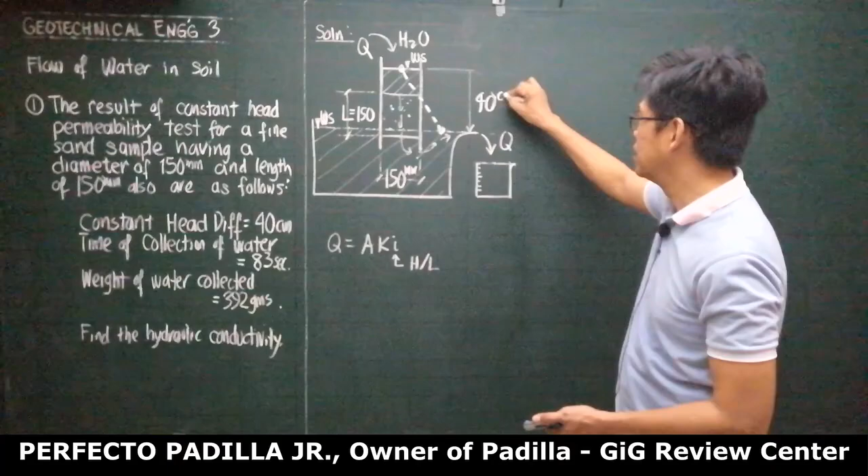The time of collection of water is 83 seconds and the weight of water collected is 392 grams. Remember that the density of water, gamma of water, is 1 gram per cc or cubic centimeter. Since this is 392 grams, at 1 gram per cc, this is also 392 cc.

What is being asked is the hydraulic conductivity, K. Let's solve for Q, the water gathered. Remember that Q is volume per unit time, and the volume is 392 cubic centimeters per 83 seconds. This is equal to the area times K times I.

The flow is here, and the area is pi over 4 times diameter squared. Let's convert to cm: 150 mm is 15 cm, so times 15 squared—this is the area—times K multiplied by I. I is H, 40, over L. The length of flow from entry to exit is 150 mm or 15 cm.

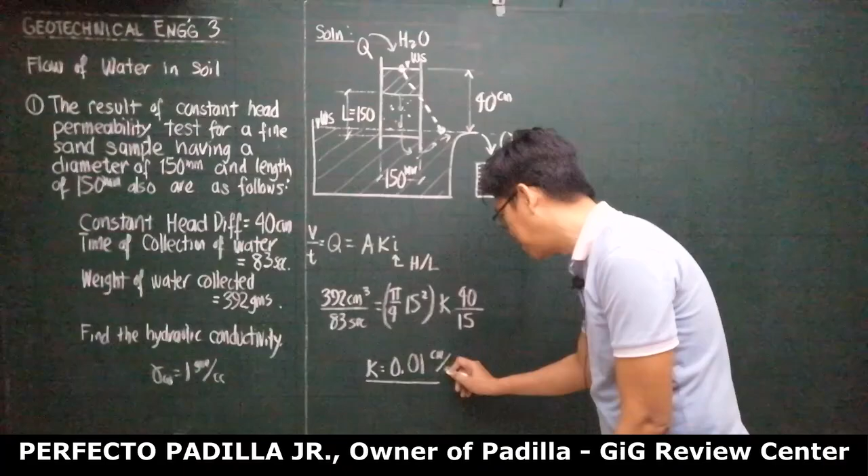So this is one equation in terms of K, and your K will be in centimeters per second because centimeters squared will cancel, leaving cm per second. Let me compute: this is 0.01 centimeter per second. You follow? Okay.

Hindi na ako mag-change ng unit or magko-convert. Anyway, parehas naman yung unit ng H, parehas yung unit ng K.

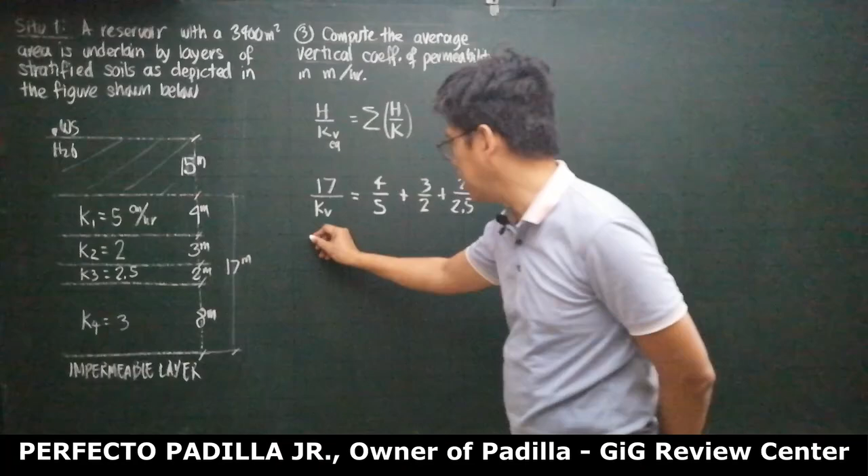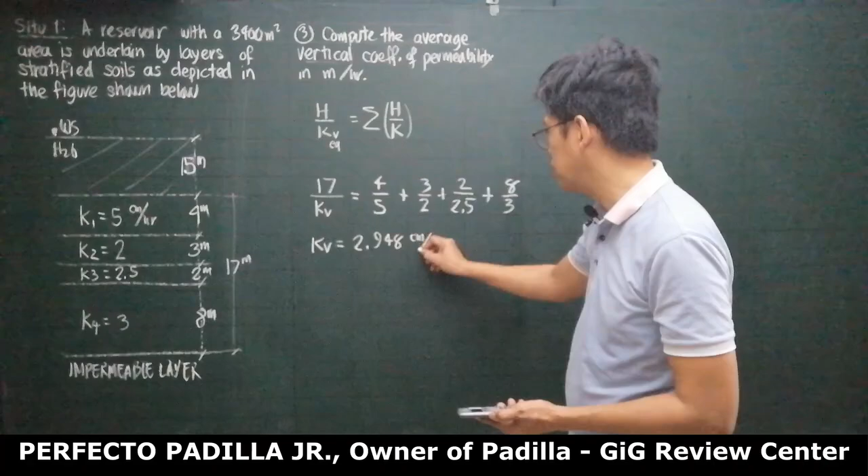So this would be 4 over 5, plus 3 over 2, plus 2 over 2.5, plus 8 over 3. One equation in terms of KV will be able to solve KV. And KV, if you compute it, it would be 2.948, and this would take the same unit as this, centimeters per hour. Okay? Sige, kopya.

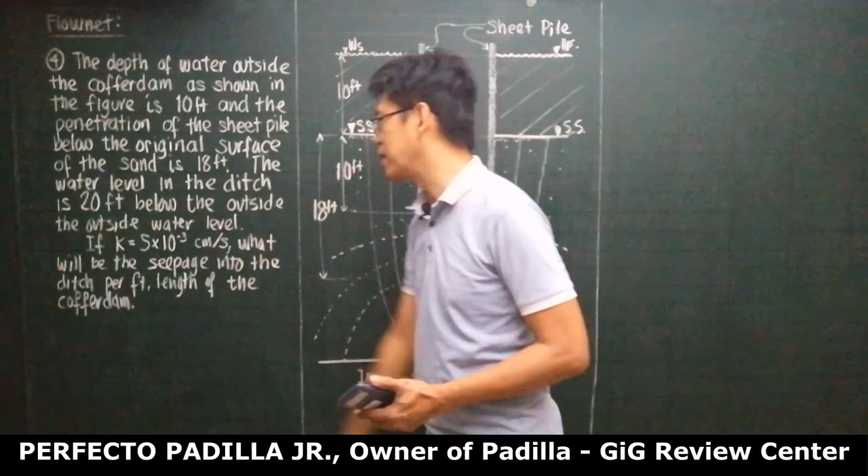What about this problem? According to this problem, the depth of water in this cofferdam outside is 10 feet. And the penetration of the sheet pile, this is the original sand layer. So the depth of penetration from here is 18 feet. From here to here is 18 feet. And the water level in the ditch is 20 feet below the outside water level, no? So this is the outside water level and this is the inside water level. This is the ditch, no? O yung daanan ng tubig sa, parang kanal ba, sa loob.

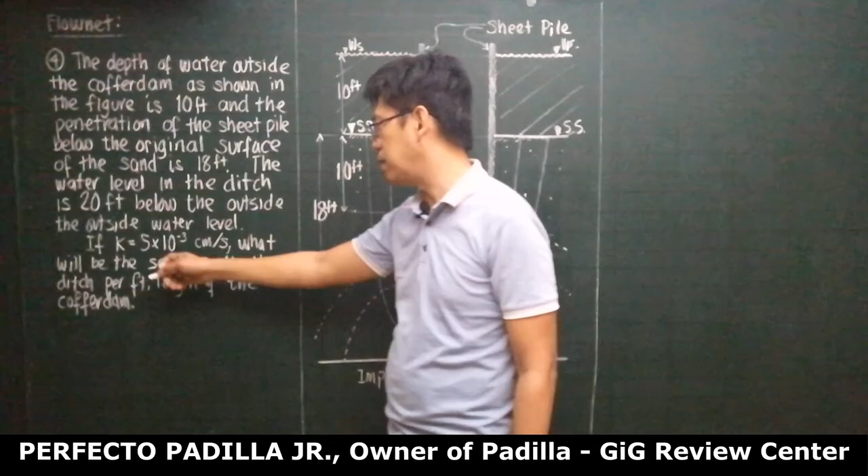So this is 20 feet below this, so 10 feet, 10 feet. According to this, K is 5 times 10 to the minus 3 centimeters per second. We are asked here, what will be the seepage into the ditch per foot length of the cofferdam?

Now, di ba sabi natin, ang formula natin para sa Q is equal to NF over ND times K times H. This is our formula. Okay? So this NF is the number of flow channel, ND is the number of drops or number of grids.

Ganito. Water will always flow through from higher elevation to a lower elevation. So alam natin ito yung entry point ng water. Dito papasok, dito lalabas. Correct? Ang energy level dito nasa surface. The energy level here sa exit point is nasa surface. From here to here, the head or the drop is 20 feet. So our H here is, this one is 20 feet. Yung K natin is 5 times 10 to the minus 3 centimeters per second. We will convert that into feet per second.

Na? Now, ano yung NF? Ano yung ND? Yung NF saka ND, number of flow channels, water will flow from here to here. And from here to here, dalawang side. Kung isang side lang ito, kaso dalawang side, so times 2 sides. Isa rito, isa rito. That is the total Q. Tama? Maliwanag? Okay. Now, yung number of flow channel per side, 1, 2, and 3. Yung parang lanes ba? Daanan ng tubig. Okay? So, you have here 3, di ba? So, ito is 3, this one.

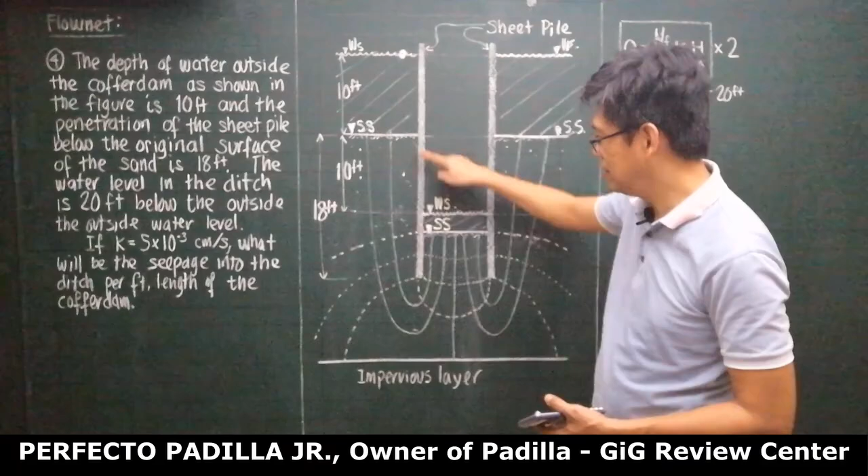What about ND? ND is the number of grids mula sa pasukan hanggang sa labasan, no? 1, 2, 3, 4, 5, 6, 7, 8. So there are 8, di ba? So 1, 2, 3, 4, 5, 6, and 7. This is not an equipotential line, no? This is 1, okay? 1, 2, 3, 4, 5, 6, and 7. Okay? So this is 7.

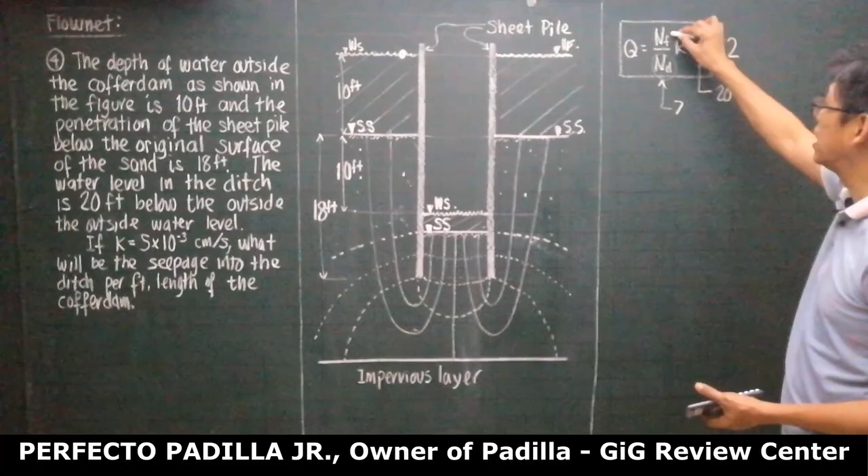And NF is 3. So we substitute our Q is 3 over ND, which is 7, times K. Our K is 5 times 10 to the minus 3 centimeters per second. So this is 0.005 centimeters per second. I-convert ko siya sa feet, ha?

So, this one: centimeters above, centimeters below, feet above. Kaya na ba natin? Okay, yung centimeters, gawin nating meter, ha? Centimeter is 0.01 meter, so this is meter. 1 meter is 3.28 feet, so this is already feet. So, meters and meters will cancel, so feet per second yan.

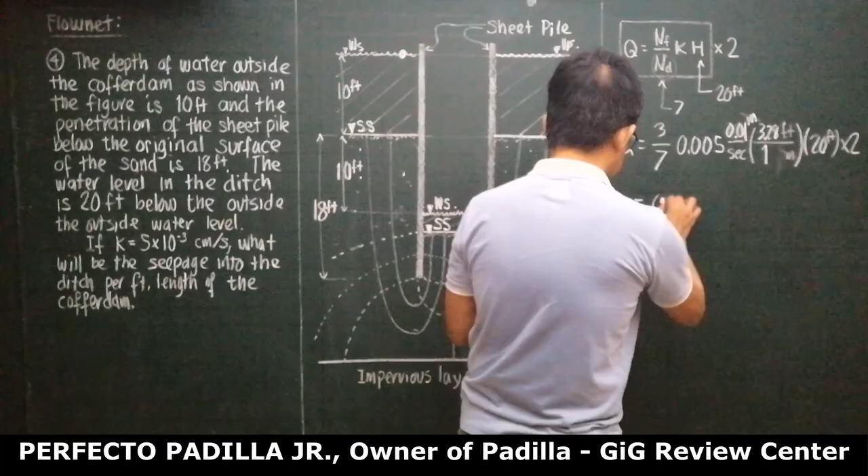Times H, our H is 20 feet, times 1 foot width, no? So, manglalabas feet, cubic foot, times 2. Okay, so computing that, we have 0.0028 cubic foot per second. You follow? Sige, paki-absorb.

Okay, let's move on to effective soil pressure. Soil pressure, vertical soil pressure is summation of gamma H, and parehas din yan sa soil. Basta vertical, kasi vertical yung gamma H is brought by gravity. Kaya yung gamma H na formula, kahit anong substance, solid, liquid, gas, applicable yan. Okay. However, pagdating sa soil, dahil meron niyang soil and merong water component, in the computation of shear strength, which we shall discuss later, kailangan natin ng effective soil pressure pati dun sa soil settlement.

Okay, so dito, yung tinatawag na gamma effective is simply gamma dry minus the unit weight corresponding to water only with the equal volume of the gamma dry.

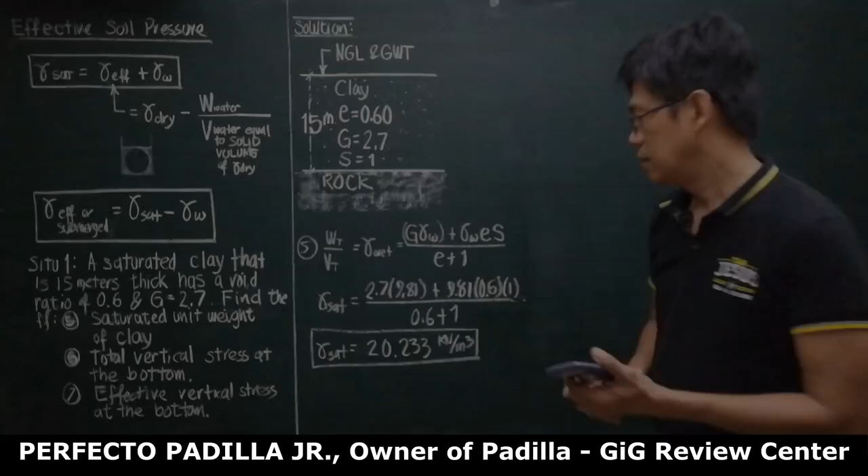Okay. Yung susunod na tinatanong, number 6, we're asked to find the total vertical stress at the bottom dito. So, this is going to be total pressure, P total, is the total unit weight, gamma sat. The total unit weight is gamma sat, right? So, gamma sat multiplied by H, which is 15. So, this is

20.233 times 15. So, you calculate this. This is going to be 303.5 kilopascal.

Now, in number 7, we're asked to find the effective vertical stress at the bottom. One way to solve that, the P effective at the bottom is gamma effective times H.

Gamma effective is gamma sat minus gamma water, times H which is 15. Our gamma sat is 20.233 minus gamma water 9.81, times 15. And this would be 156.345 kilopascal.

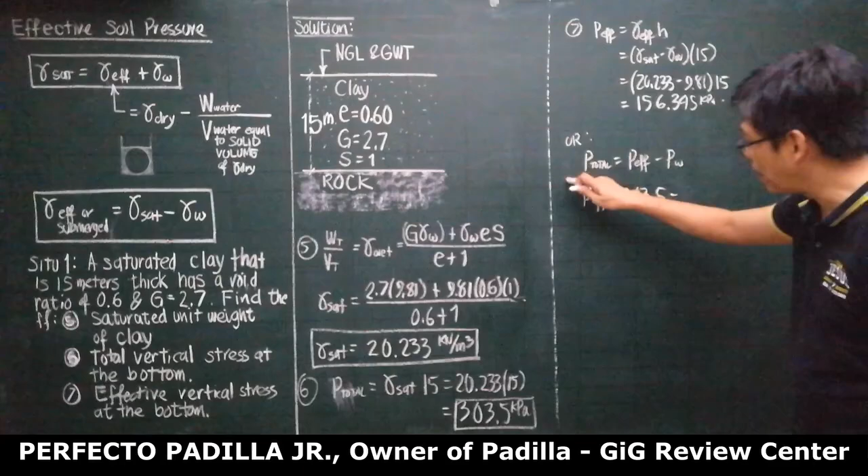Got it? Or another way to solve that: P total is simply P effective plus pressure due to water. So our P effective must be equal to P total, that is 303.5, minus... this is plus, no? P total is P effective plus water. So therefore this is plus pressure of water, gamma water 9.81 times 15.

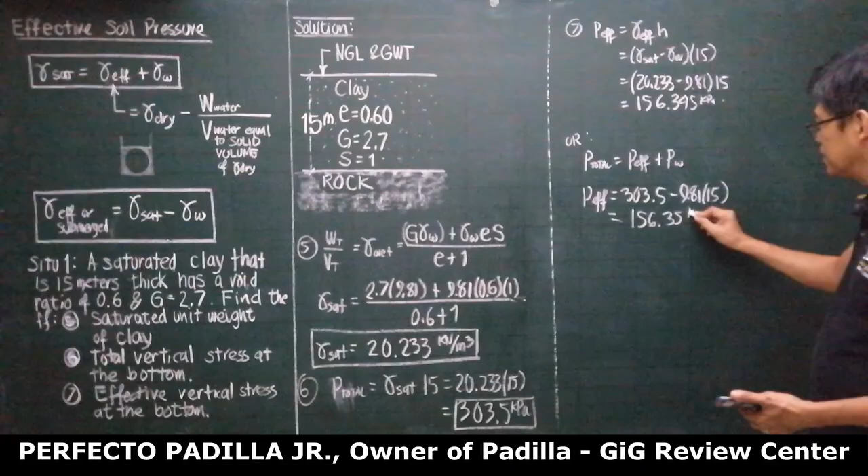So therefore this must be exactly the same as this, 156.35 kilopascal. Got it? Clear? Okay, go ahead and absorb that.

Let us have this problem. When we say lateral, it means horizontal. Now, in liquid or water, the vertical pressure is gamma H. The horizontal pressure at that depth is also gamma H. That's what Pascal said, that in an ideal fluid or incompressible fluid or liquid, pressure is transmitted or radiated in all directions unreduced.

But when it comes to soil, it's not unreduced, it is reduced. So if gamma H is the vertical pressure going down, the horizontal is gamma H times a certain number, called the coefficient of lateral pressure. If it's a reaction, then that would be passive pressure.

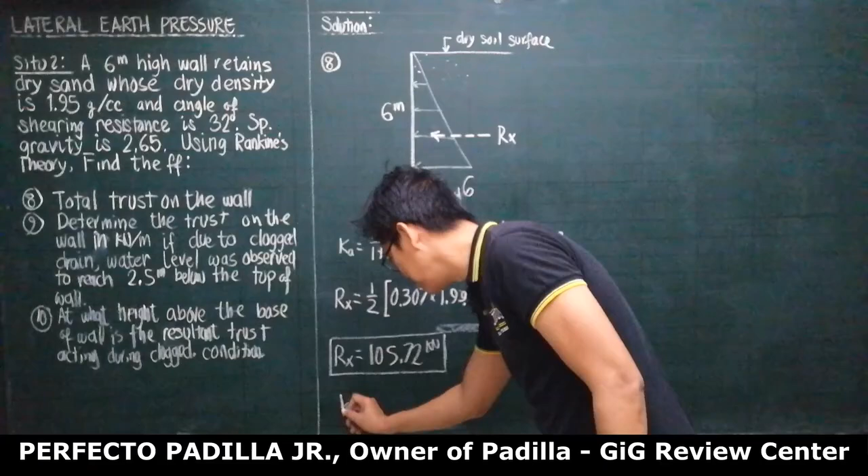Got it? So when it's active pressure, the gamma H is simply multiplied by Ka. Our Ka is 1 minus sine phi over 1 plus sine phi. But when it's called passive, K passive is equal to 1 over Ka. Because Ka is less than 1, Kp is more than 1.

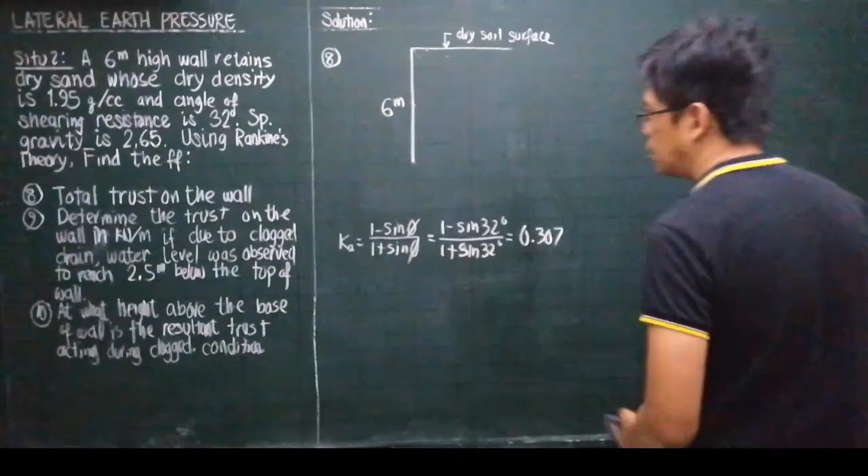Okay, what about item number 9? We are to determine the thrust on this wall due to clogged drain. So we have a drain, but it clogged. But maybe not all of it, right? Because if all of it clogged, the water would reach up to here.

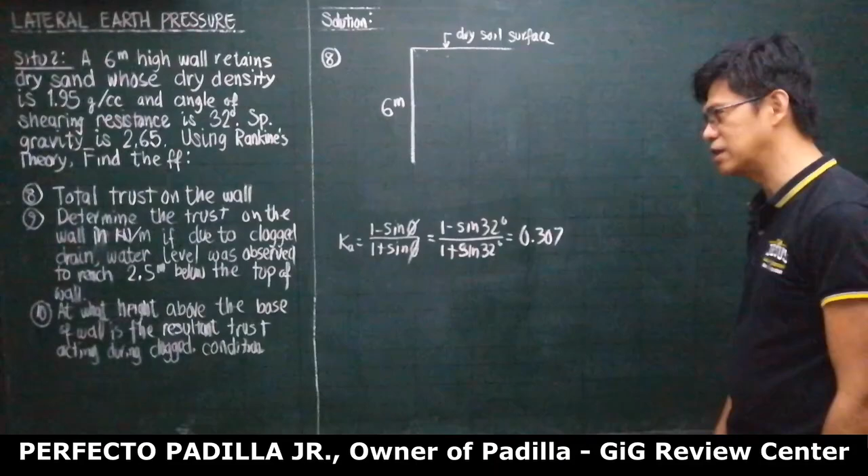So due to clogged drain, meaning during heavy rainfall, the water here doesn't go down. Instead, the water table rose to 2.5 meters below the top of the wall. So if this is the top of the wall, it reached 2.5 below. Here is the water table. I would presume, since no saturation above the water table was given, I will still presume that this is dry.

So this is our water table, meaning this is saturated. Okay? Actually, it's not really possible to have dry then suddenly saturated. There's an in-between within the capillary region. Anyway, just for the sake of the problem, we presume that this is dry and this is saturated.

Let me label this here. This is dry soil, this is saturated. Now remember our K for soil is 0.307. But what is the K of water? It's 1, right? If it's gamma H for water, horizontally it's still gamma H for water. That's why effective soil pressure is important.

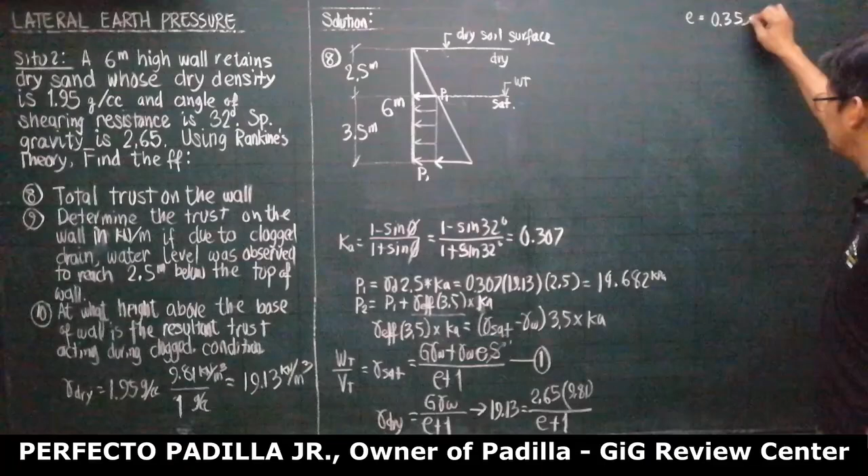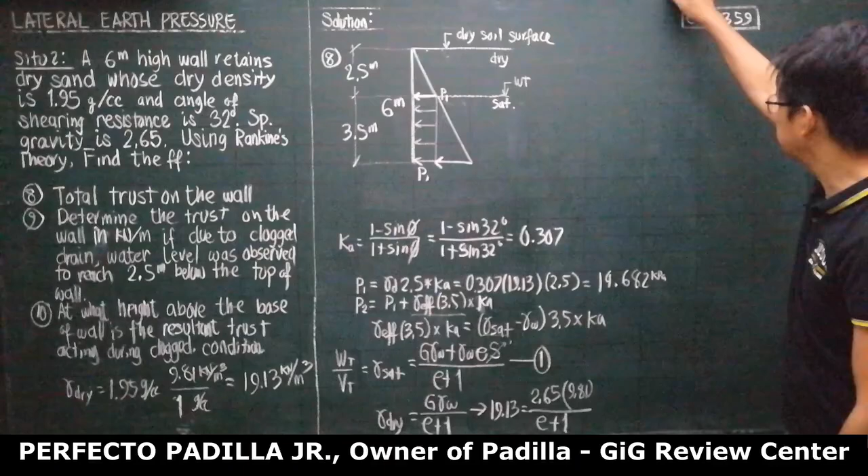Meron na tayong E. We are ready to solve our gamma sat. Yung gamma sat natin, our gamma sat in equation 1, is going to be equal to G, that is 2.65, multiplied by gamma of water, 9.81, plus gamma water, 9.81, multiplied by E times S, which is 1. Our E is 0.359. S is 1 over E plus 1, 0.359 plus 1. So you solve this one, we'll be able to get gamma sat is going to be equal to, pag sinolve mo to, you'll get 21.721.

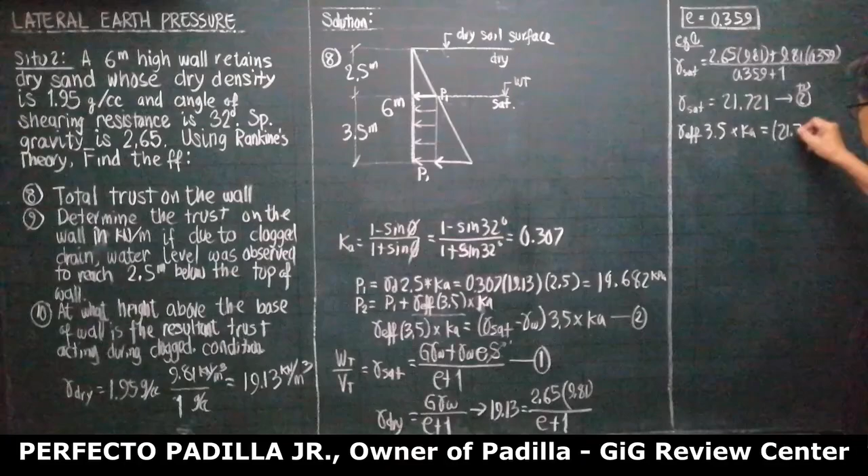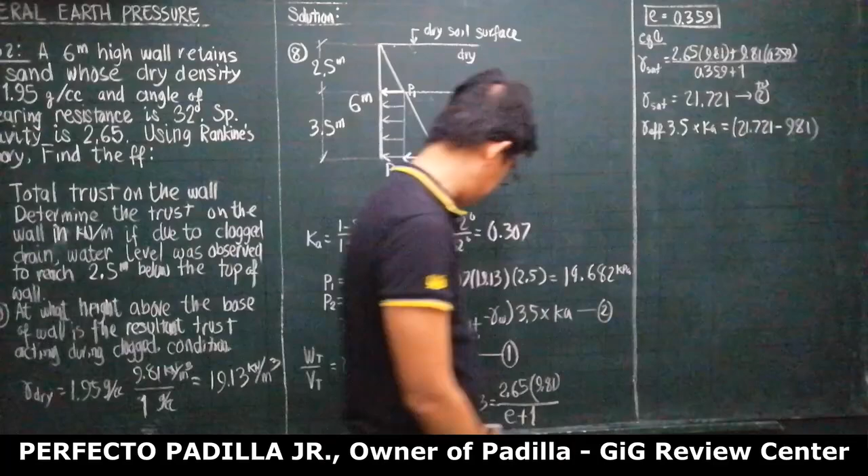So we are ready for this one. Therefore, tawagin natin itong equation 2 na lang, patras. Okay? Our equation 2, so substitute this to equation 2, you'll have here yung ating gamma effective times 3.5 times Ka is going to be equal to this, 21.721 minus gamma of water 9.81, correct? So minus 9.81 times 3.5 times Ka, which is 0.307.

So if we're going to compute this, this will be 12.8 kilopascal. So let me reflect that in the drawing, the value, this is 12.8. Your P1 is 14.682. Ito is pressure due to effective soil. Pero may tubig yan eh, pero ang tubig hindi mula dito. So yung pressure due to water, ito. This is going to be gamma water times height. The height of water is 3.5. So gamma water times height of water, 3.5. So this is 9.81 multiplied by 3.5. Ano ang multiplier na K? 1, kasi tubig to.

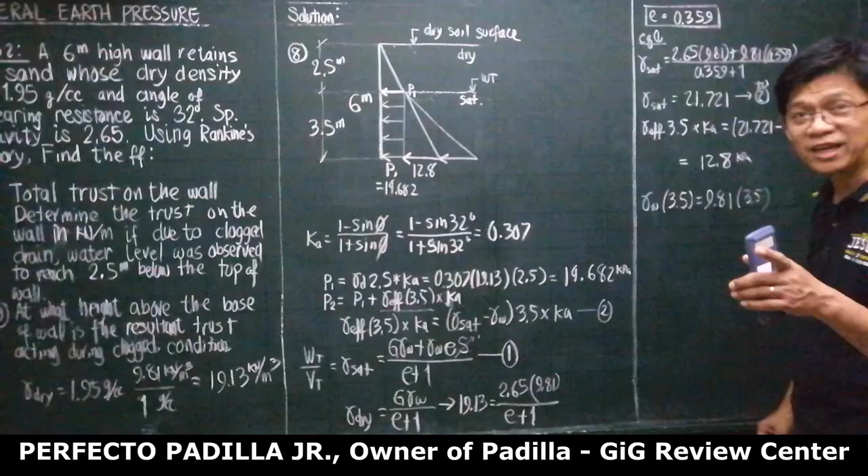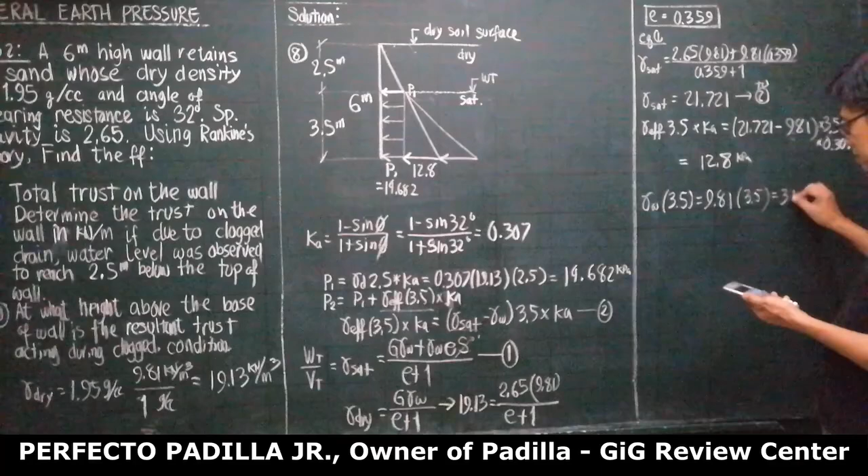This is pressure due to water. So, therefore, this is going to be equal to 34.335 kilopascal. Naintindihan? So kung kukumputin natin yung mga resultant, tawagin natin tong F1. For the rectangle, tawagin natin tong F2. For this triangle, tawagin natin tong F3. While for this triangle, let me call this F4. Computing all those forces, our F1 is going to be the volume of that pressure prism, area ng triangle, 1/2 the base.

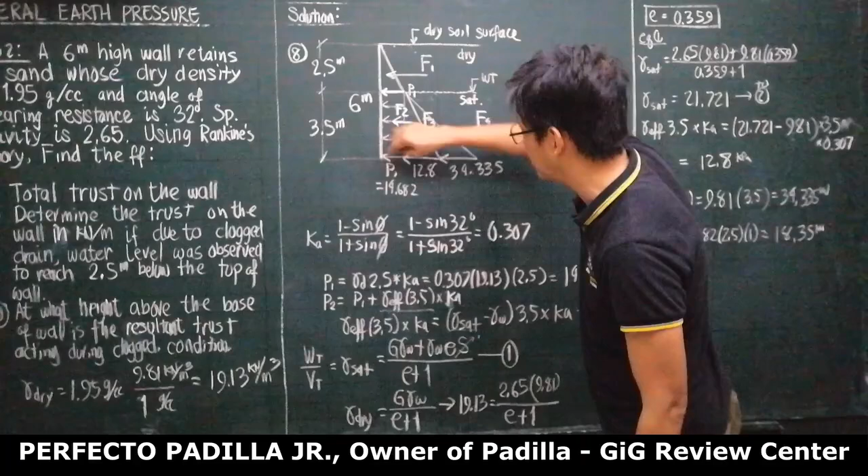The base is P1, which is 14.682, times the height, 2.5, times 1 meter strip. You compute this in your calculator, what you will have will be 18.35 kilonewtons. So computing yung F2, our F2, this one, is the volume of this rectangular pressure prism. So that is simply area of rectangle, P1 times height. So it would be 14.682 times the height, which is 3.5, multiplied by 1 meter strip. So you compute this and you will get here 51.38 kilonewtons.

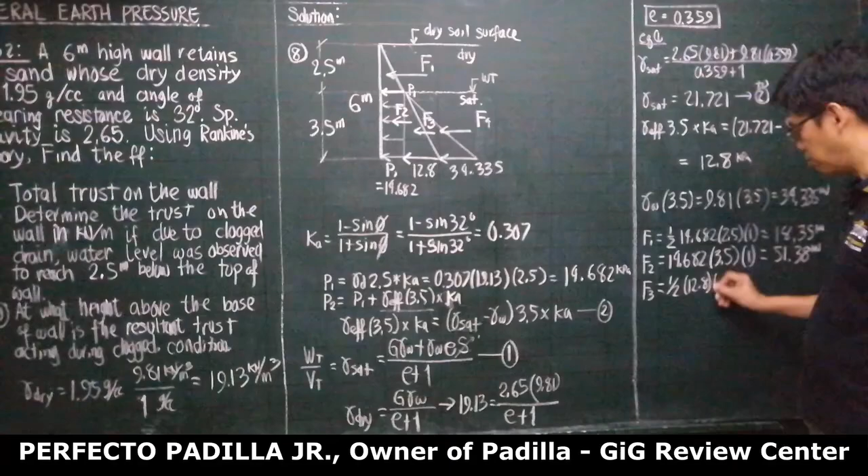Now, yung F3 naman is going to be the volume of this triangular pressure prism. It's the area of the triangle, 1/2 of base, which is 12.8, multiplied by the height, 3.5. I'm referring to this triangle. The volume of that triangle is F3. So, times 3.5 multiplied by 1 meter strip. So you calculate this one and you compute, you'll get 22.4 kilonewtons.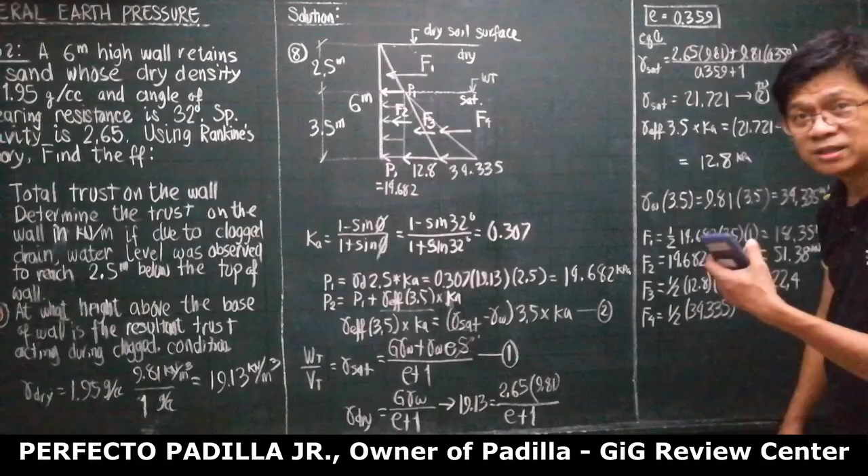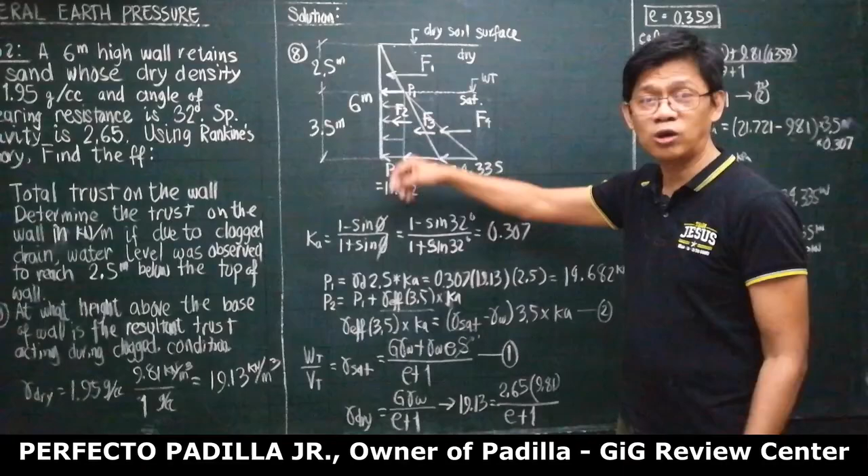Lastly, for this water pressure, our F4 is going to be equal to 1/2 of the base, 34.335. As you can see, the pressure of water is not negligible - this is actually even more than the pressure exerted by the soil itself. So, 34.335 multiplied by the height, this is 3.5. 1/2 of this times the height, 3.5. The height is not this one, this is slant height. By rule of perpendiculars, the area of a triangle is 1/2 base times height. Base is horizontal, height is vertical. Times 1 meter strip. So you calculate this and this is going to be equal to...

60.09. If you total this now, this is the resultant force. The resultant force is simply the summation of horizontal forces. And this is 18.35 plus 51.38 plus 22.4 plus 60.09. You add this and you'll get 152.22 kilonewtons. Understood? Okay, please absorb this first.

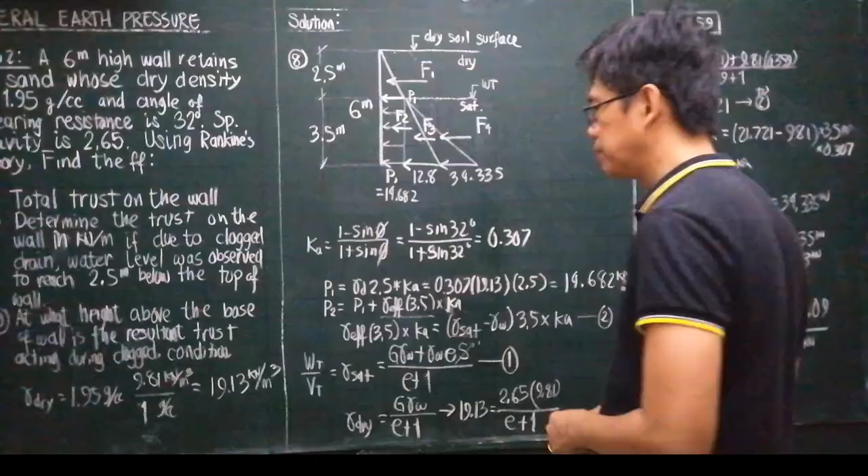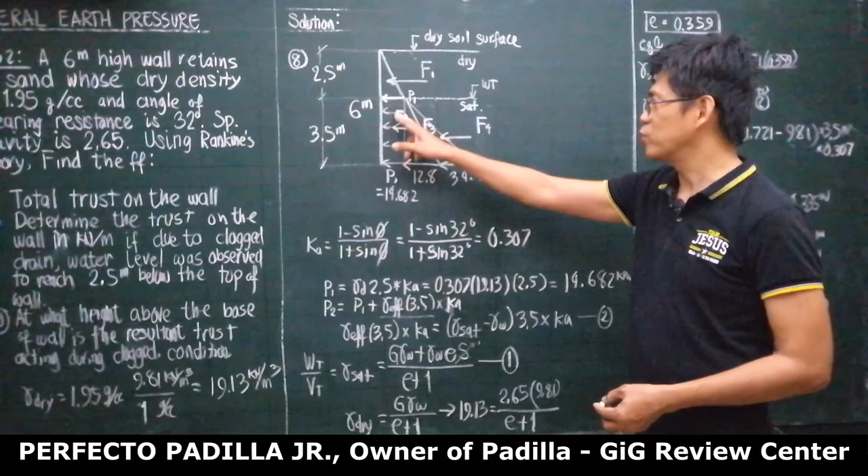So what about this number 10? At what height above the base of wall is the resultant thrust acting during the clog condition? So if these are the forces F1, F2, F3, F4, the resultant of these, this is 152.22 - where is it? Let's say the resultant is here.

Let us call this Rx, and the vertical height from the base is y bar. Now, Rx is the resultant of F1 to F4, right? So we say by Varignon's theorem, the moment of the whole equals sum of the moments of the parts.

So let us apply Varignon's theorem to solve y bar. The moment of Rx about the base equals sum of moments of all other forces composing Rx, about the base. So our Rx, we found this to be 152.22 kilonewtons, and the moment arm about the bottom is y bar. So Rx multiplied by y bar equals F1 times its moment arm. The moment arm of F1 from the base, since this is a triangle, is 1/3 of 2.5, about the base, plus 3.5. So it would be F1, our F1 is 18.35, multiplied by 1/3 of 2.5 - that is the position of the centroid of the triangle - plus 3.5.

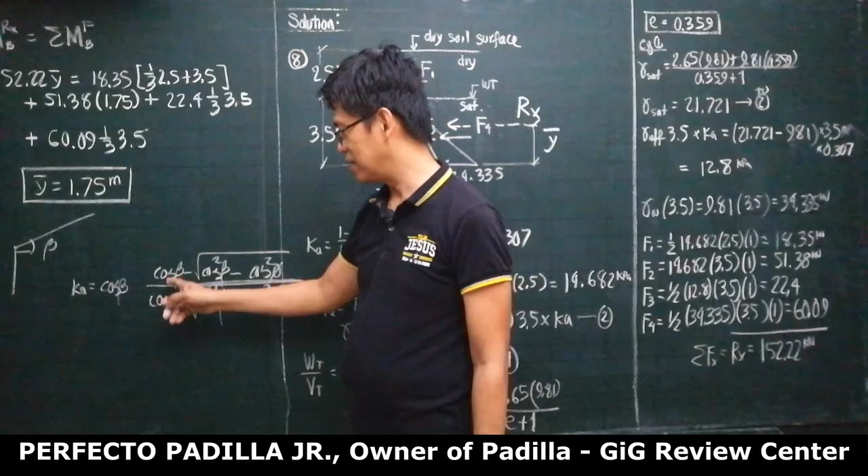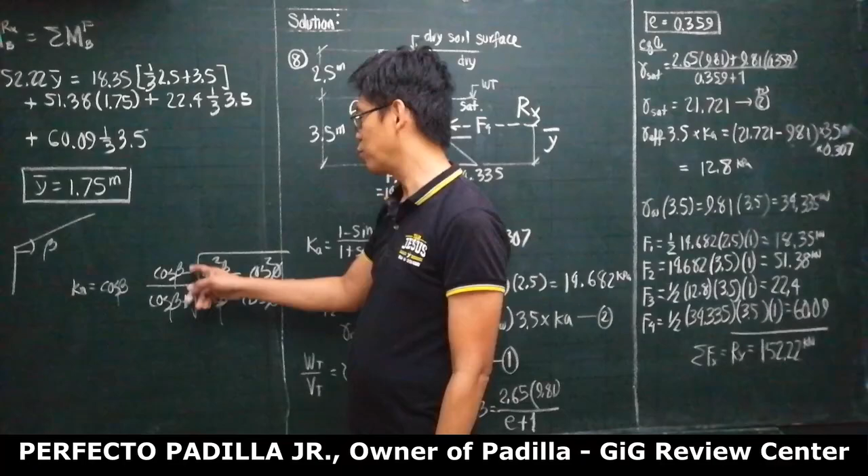For K passive, it's 1 over Ka. So Ka is less than 1, Kp passive is more than 1. Clear? Understood? When beta is 0, meaning flat like this, so beta is 0. When beta is 0, this becomes 1, 1, 1. So if this is 1 minus cosine squared phi, 1 minus cosine squared is sine squared. So square root of sine squared phi, that is sine phi. So it becomes 1 minus sine phi over 1 plus sine phi - this formula. Understood? Okay, please absorb this.

When it comes to settlement, the principle is this - I already discussed this under soil compaction. The analogy is a foam sofa or foam bed. This is the wood base, this is the foam. When you lie down or sit on it, the element that gets compressed or settles is not the wood part. The wood part relatively has no compaction. What gets compacted is only the foam, right? The foam gets pressed. Understand?

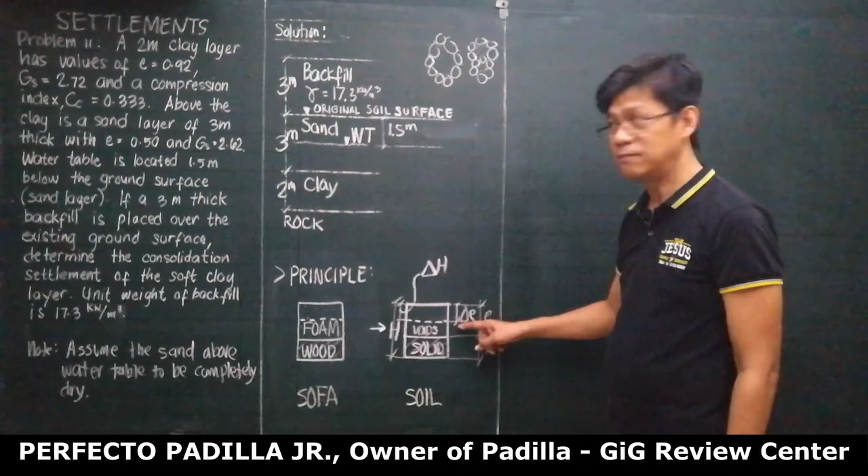So we'll use this analogy so we don't have to memorize a complicated formula. We have: delta H is to delta e, as H is to e plus 1.

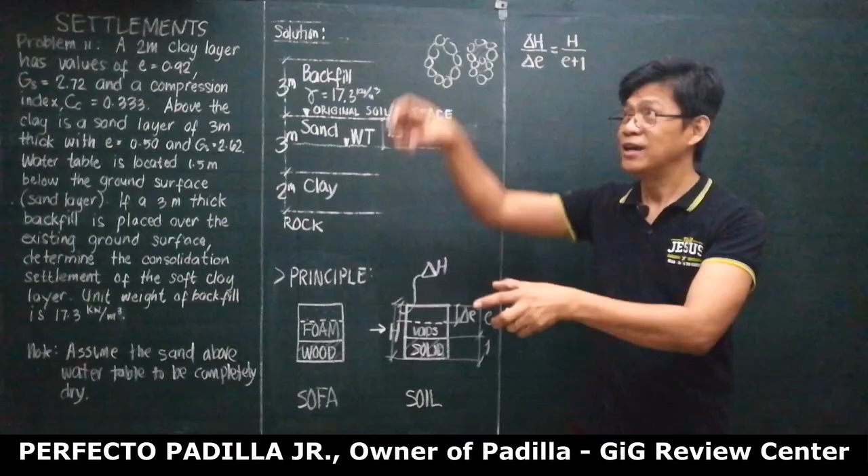Okay? Hindi basta-basta, hindi yun analogy lang. Pagmasdan yung sabi ha. Pag tinuloy mo yung sinabi ni Lord, ang sabi niya is, foolish is a man who builds his house on sand. The rain pours, the wind blows, representing shaking. The rain pours, representing water. Anong mangyayari kapag ang sand na-saturate?

Ang sand kasi, umaasa lang yan sa friction between particles to hold this together. Imagine, ito yung load. Kung ito yung load, umaasa yan sa shear strength. Yan yung topic natin after this. So kapag nasira yung support nito, mag-collapse yan. Tama? Mawawala ng support yung building.

Correct? So, umaasa ka sa friction. Pag linubog mo yan sa tubig, ang tubig will serve as lubricant. Mababawasan ang friction. So, pag nabawasan ng friction, lalo nang posibleng mag-fail yan. Right? Naintindihan? Lalo na kung nakalubog, yung friction will be negligible. Lalo na kung kinalog mo, pag kinalog mo yan, lulutang yan. Yun yung tinatawag sa geotechnical engineering na liquefaction.

Okay? The loss of strength due to loss of contact. Kasi friction lang inaasahan mo eh. Yun yung beauty ng clay. Kasi ang clay, kung pure clay, wala man siyang friction, pero meron siyang cohesion. Dahil malagkit yan, magkadikit talaga. Tama? May cohesion eh.

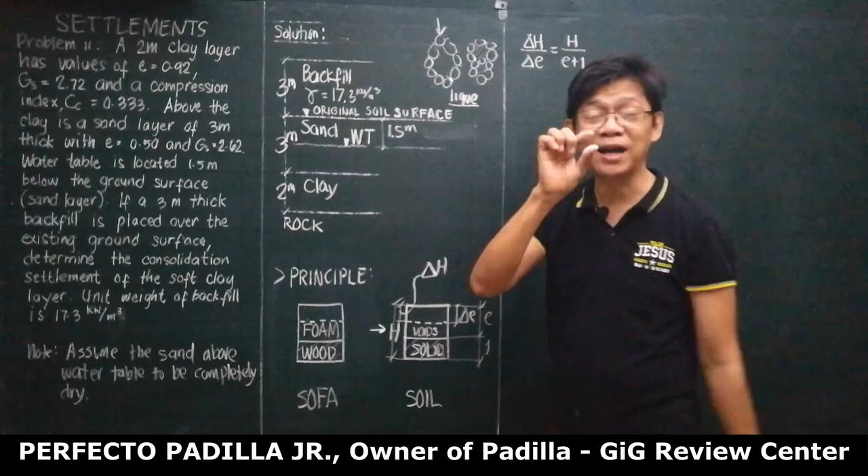Okay. Now, kapag kinalog mo yan, kahit kalugin mo yan, magkadikit pa rin yan. Pwedeng ma-deform ng konti or malaki, depende sa condition ng clay mo, pero still, hindi siya mawawala ng totally ng strength. Naintindihan nyo? Yun yung concept.

Kaya, after that, actually may kakilala akong structural engineer noon, a lot more senior than me, na yumaman dahil sa lindol na yun, no? Kasi, yung isang building, if I'm not mistaken, kaisa-isang building sa buong Dagupan, it's a 6-story building na siya yung structural engineer. Kahit hindi pa siya masyadong senior, nasa 27 siya noong time na yon.

Yun yung kaisa-isang building na pa-after ng lindol, 6 stories, hindi nagiba sa Dagupan. Bagong building. So, nakilala yung pangalan niya doon. After that, ang dami niyang naging project. Hindi ko na sabihin pangalan niya, ha?

Nung una, pinagtatawanan siya dahil OA daw yung pagkakakonstruct niya. Kasi 6-story lang naman. Tapos, hindi pa masyadong popular nun yung ginagawa na sa time namin yung pile foundation. Kasi yan yung thesis niya nung nag-aral siya. So, maraming nagtatawa sa kanya dahil 6-story lang yung building niya. Hindi, 4-story building, no? Tapos ipinail, ginamitan ng pile. Nakakatawa nung time namin, 4-story tapos ginamitan mo ng pile. Wala ngang elevator.

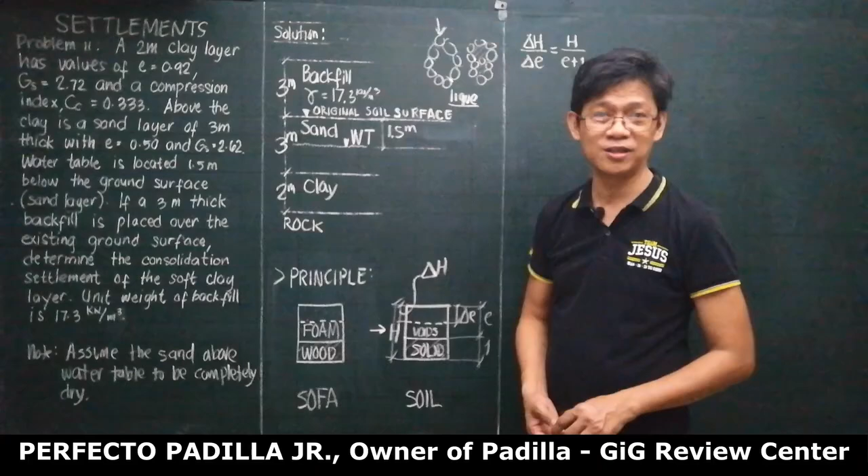Naintindihan niyo? Nakuha niyo yung concept nito? Maliwanag. So, foolish is a man who builds his house on sand, lalo na kung saturated. Pero hindi sinabi ni Lord na foolish is a man who builds his house on clay. Pero hindi niya rin sinabing wise. Pero dito sa Pilipinas, most of our soils are clayey. Meron talagang clay.

Kaya nga, itong halos buong Asia, kaya nga tayo ay rice eater. Hindi nyo ba napansin bakit tayo rice samantalang pwede naman talagang ang kainin natin potato? Bakit tayo rice eater? Although nag-grow tayo ng potato, it is simply because it is dictated by our soil. Kasi mayaman tayo sa clay soil. Alam naman natin ang gustong lupa ng palay, di ba? Clay. Naintindihan nyo ko? So, anyway, tuloy natin.

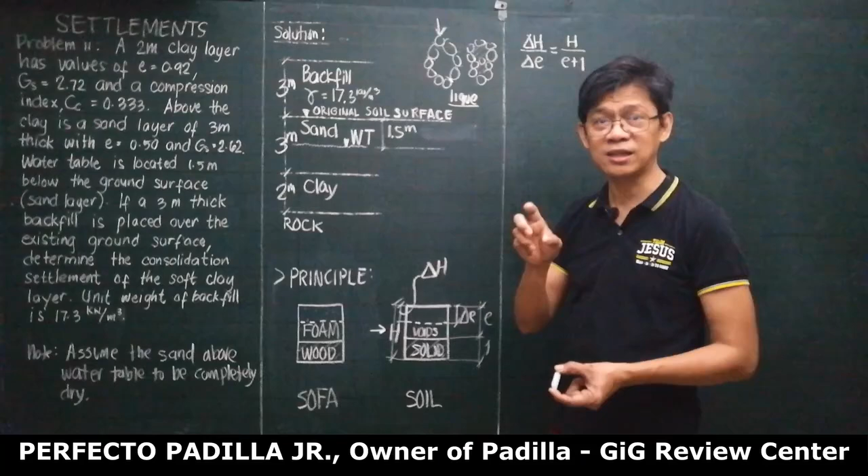So, hindi sinabi ni Lord na clay is a bad foundation. It is the in-between. Pero not close to being as bad as sand. Isa lang ang problema ng clay. That is the settlement.

It's not that it will not settle or it will settle very bad. Ang problema sa settlement ng clay is because the granules are very fine, yung moisture or yung water will take time para ma-discharge or ma-displace. So ang ibig sabihin, ang settlement niya will happen very or extremely gradual. Minsan, it will take years to realize yung full settlement ng clay. Kung magtatayo ka ng building nasa clay, maghihintay ka ng years bago mo ma-realize yung full settlement, baka hindi mo matapos yung building. So the challenge is to be able to predict accurately yung magiging settlement.

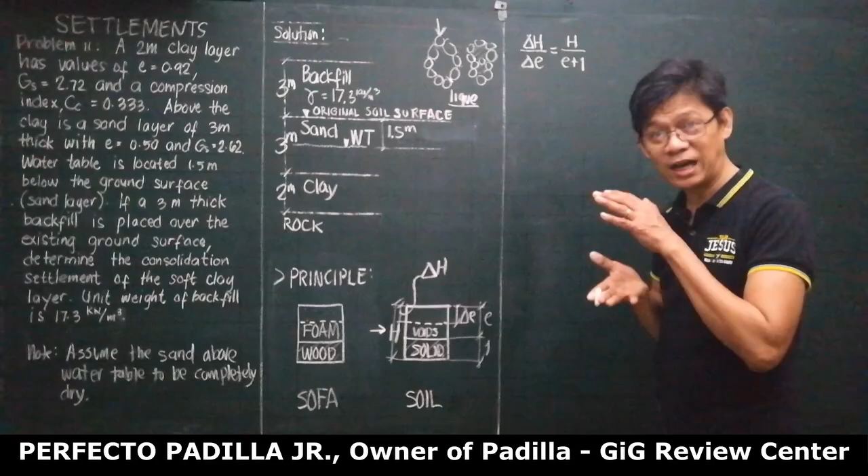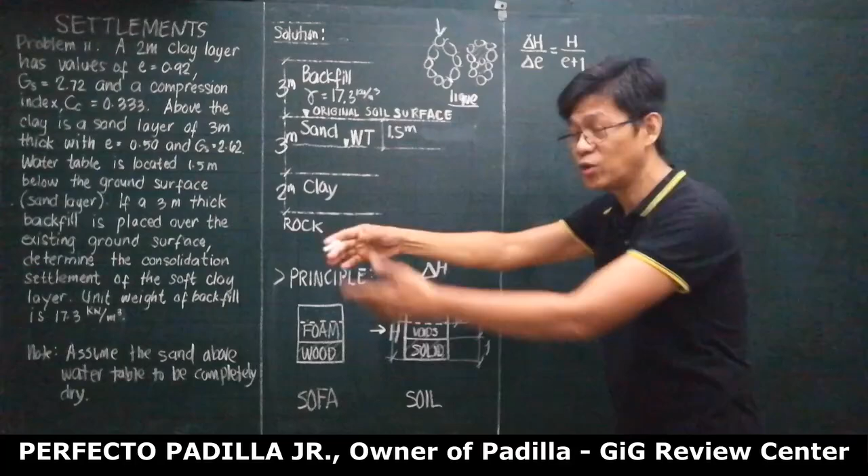Naintindihan? Okay, let's do it. So dito, etong delta H na binabanggit natin dito, automatically, ang pinag-uusapan natin, clay. So ito ay delta H in the H of clay, delta E in the E of clay, ito is E of clay at present. Itong dalawang to, present to. Ngayon yan. Etong delta E na to, saka tong delta H na to, future to. So ito yung predict natin. To be able to predict delta H, you will be able to predict or calculate accurately yung magiging change in E.

Naintindihan? Yung change in E, kinukompute natin yan using the E log P diagram. Mas magandang maintindihan nyo lang to kesa i-memorize lang natin basta yung formula. This is the E, this is the log of P. Our time allotted will not be sufficient to discuss all cases. So I will just discuss etong basic case, yung normally consolidated clay. Itong bend point na to, ito yung pre-consolidation pressure, PC, or yan yung pressure, PO, in case of a normally consolidated clay.

So equal to PO for normally consolidated clay. Naintindihan? Okay. Now, ito, the slope of this is the consolidation coefficient. So or compression coefficient. Some call it that way. So this is 0.009 LL minus 10. LL is the liquid limit in percent.

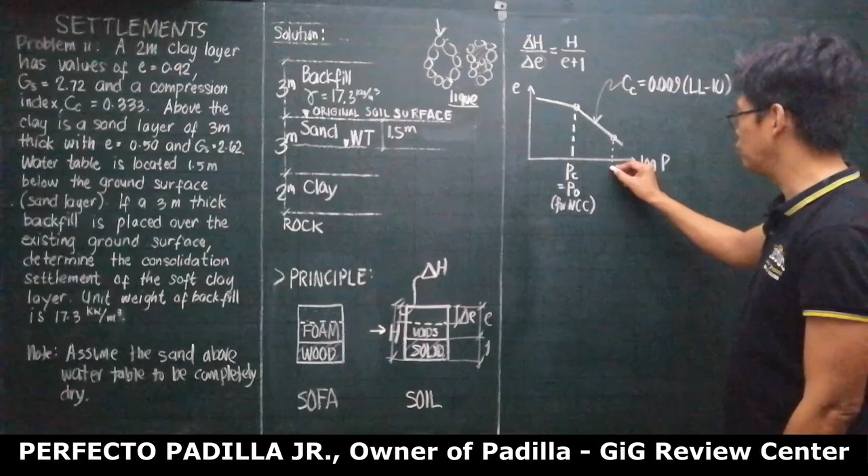Okay? Now, etong horizontal naka-log. So etong point na to is representing the pressure at mid-clay layer plus the pressure added by the structure or by the additional load. So ito will be PO plus delta P. So, di ba, yung change in X is X right minus X left. Kung yan ay P or X lang. Pero ito log X or log P. Ang ibig sabihin kung ito PO, mula dito hanggang dito, dito ko lang sulat ha, this must be log of PO. Kung ito PO plus delta P, yung distance nitong point na to from this vertical axis is log of PO plus delta P.

Kaya itong horizontal na to, taking it from this triangle, ito, this horizontal is going to be log PO plus delta P minus log PO.

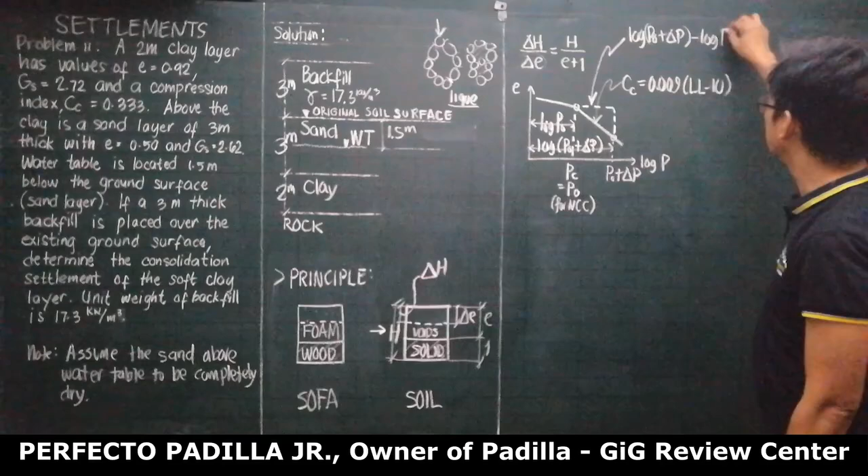So this is log of PO plus delta P, minus log of PO. By property of logarithm, but even without remembering the property of logarithm, you can solve this using a calculator since it's clear. But if you know the property of logarithm, you can also use it: difference of logarithms is logarithm of quotient, so PO plus delta P over PO.

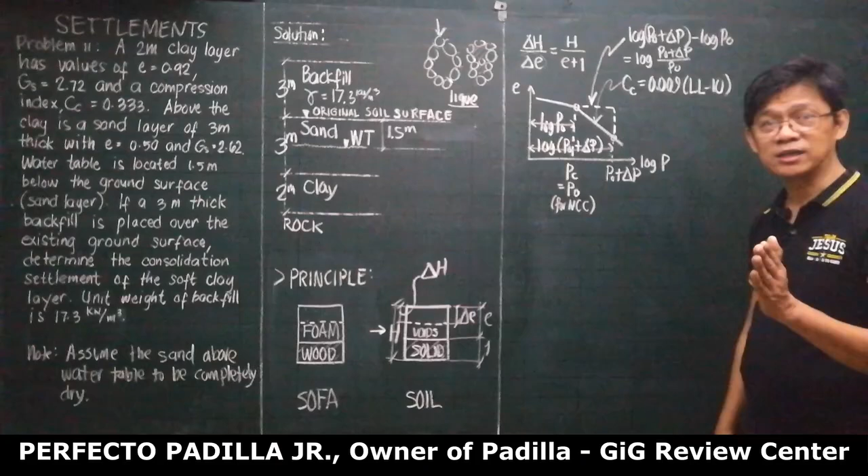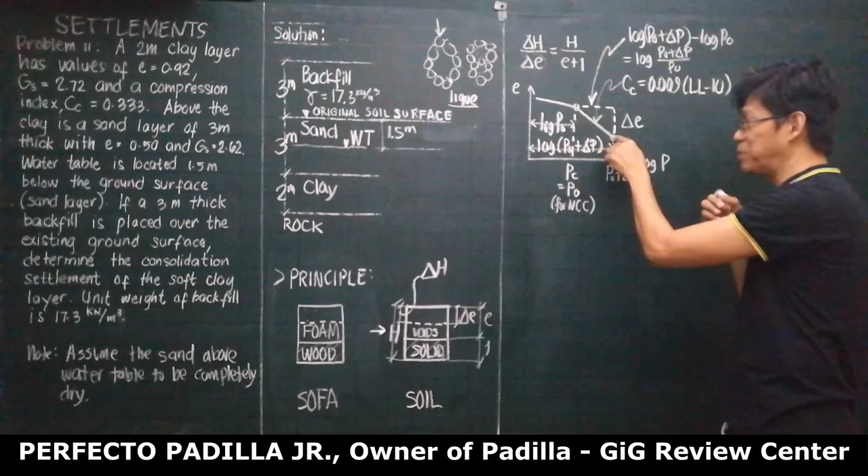We know the formula in analytic geometry, y is mx plus b. I'll limit it to y is mx, limiting it to a triangle. So if this is x, and y is e, this is the change in e, delta e, brought about by delta p. Because this is just PO, and this is PO plus delta p. So the change in e brought about by delta p is this.

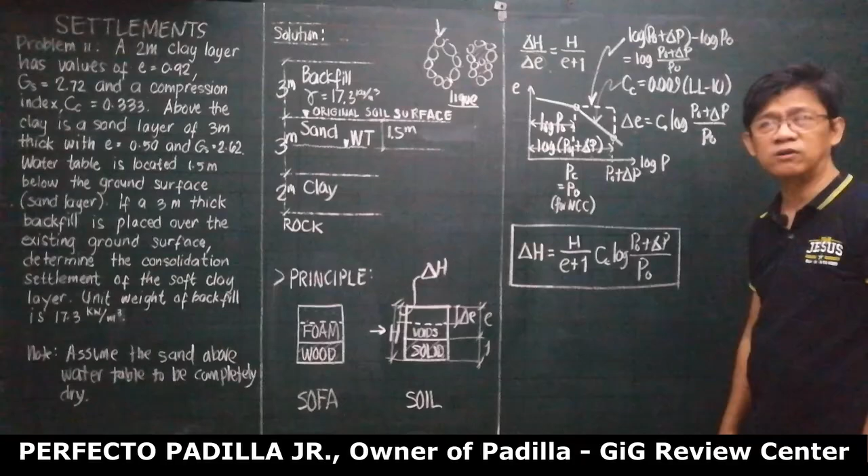So this is y is mx. What is the slope? CC times log of PO plus delta P over PO. So if I substitute that, delta H is going to be equal to H over e plus 1 times delta E, and delta E is CC log of PO plus delta P over PO. This is the formula you'll see in books.

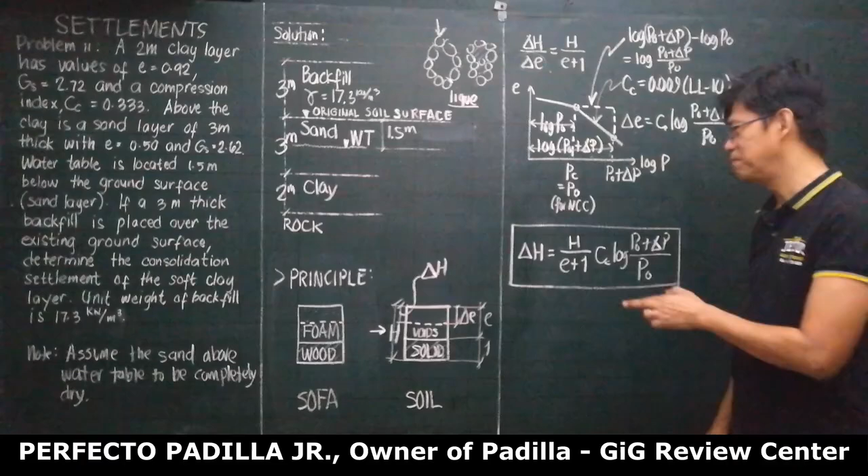Let's have this problem now. We have here sand and clay, 3 meters and 2 meters. The water table is located at 1.5 meters beneath the soil surface. This is the original soil, and what we are solving here is actually the settlement of clay. This is the original situation.

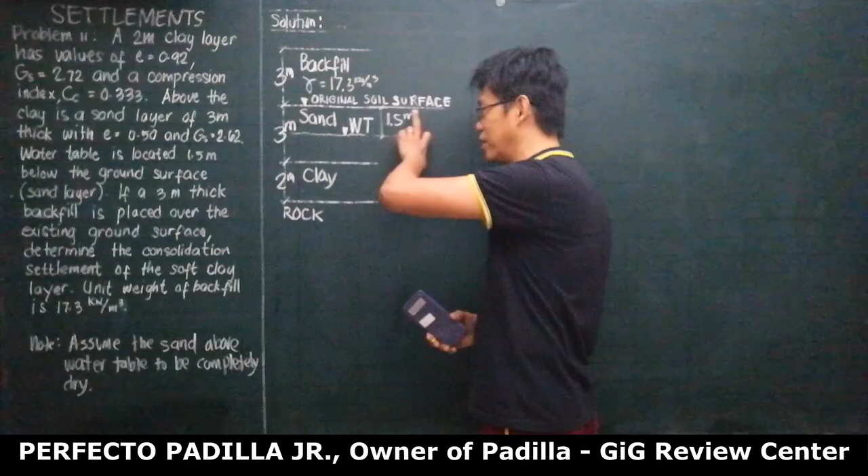Then this soil was loaded with a backfill. But the load is the backfill, maybe temporarily piled with soil. The question now is: what will be the settlement of clay? There are many reasons why we do backfill construction-wise, to level the ground, sometimes it's for pre-consolidation pressure, and so on. But what we are interested in here is that this backfill is serving in this problem as a load.

So for the 2 meter clay layer, our e is 0.92, Gs is 2.72, and the compression index CC is 0.333, so we won't compute that. Above the clay is a sand layer 3 meters thick, with e of 0.5 and Gs of 2.62. The water table is located 1.5 meters below the ground surface, and this is the ground surface.

If a 3 meter thick backfill is placed over the existing ground, we are asked to determine the consolidation settlement of the soft clay layer, given that the unit weight of the backfill is 17.3.

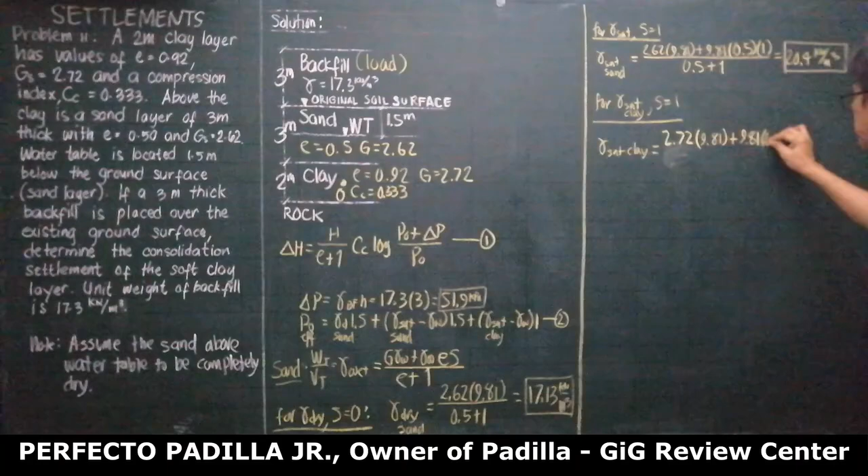Isa na lang ang problema natin, yung clay. So para naman sa clay, yung gamma sat of clay, S equals 1. So gamma sat of clay is going to be G of clay, 2.72, times gamma of water, 9.81, plus gamma of water, 9.81, times E of clay, 0.92, dahil gamma sat, S is 1, all over E plus 1, the E of clay is 0.92 plus 1. You calculate this now, and this is going to be 18.6 kilonewton per cubic meter.

Okay, alright, so meron na tayo nitong mga gamma sat, gamma dry, gamma sat of clay. All we need to do is substitute everything to equation 2. So substituting all these values to our equation 2, we have PO effective is going to be gamma dry, which is 17.13, times 1.5, plus gamma sat of sand, which is 20.4, minus 9.81, multiplied by 1.5, plus gamma sat of clay, 18.6 minus 9.81 times 1 meter. So you try to calculate this now. This is going to be your PO, and PO will be 50.37 kilopascal. So we are now ready to substitute to equation 1 in order to solve our delta H.

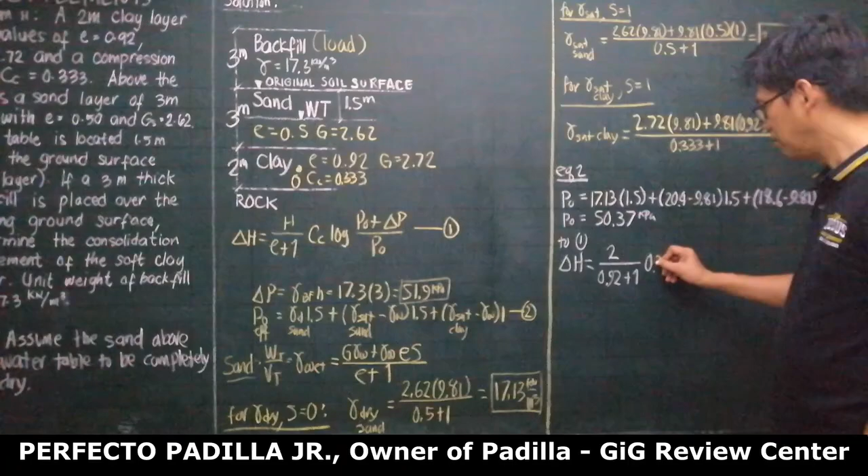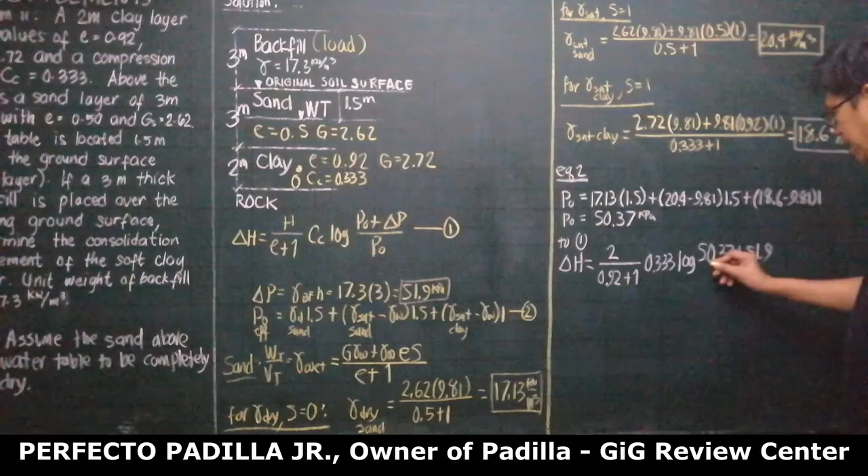It is equal to H of clay. The H of clay is 2 meters, over E of clay is 0.92 plus 1, times CC, 0.333, multiplied by log of PO 50.37 plus delta P, the delta P is 51.9, over PO 50.37. So you try to calculate this. Our delta H is going to be equal to 0.107 meter or 107 millimeters. Naintindihan? Klaro to? Okay, sige, kopya.

Let us take situation number 3. In a triaxial test of a normally consolidated clayey soil, cohesion and angle of internal friction were found to be 31 for cohesion and 28 degrees for angle of friction. We are asked to find: the maximum shear stress is 65, find the confining pressure sigma 3, and compute the principal or maximum stress and the normal stress at failure.

What we should remember is just for friction, from mechanics we studied: if this is the normal force, this is the weight, and there's a force here, the resistance is friction, and friction equals mu times N. The resultant of F and N, call it R, makes an angle phi with the normal. So if this is friction, this is N, this is R, this is phi. If this is F, then tangent of phi is F over N. But F over N is mu.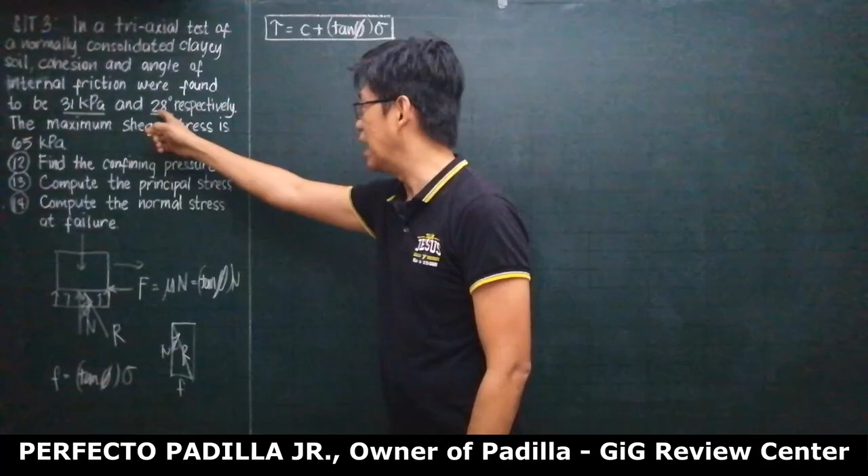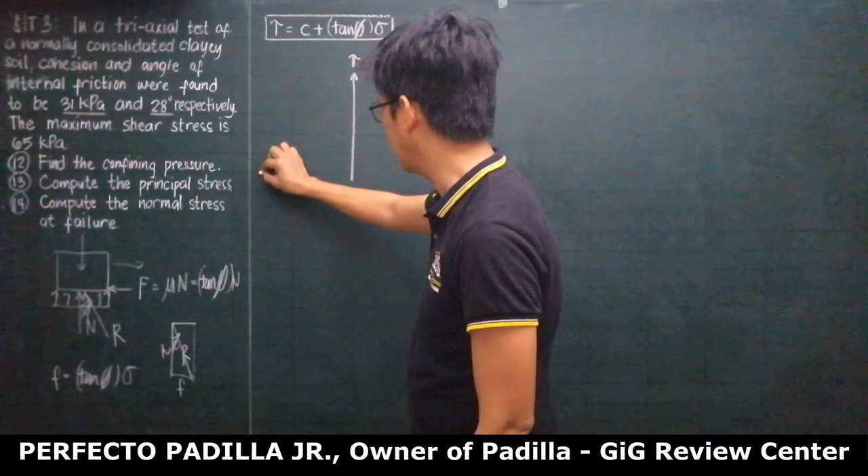Okay, back to this. So we're told cohesion is 31, and our angle of friction is 28. Look at this equation: if this is our tau axis and this is our sigma axis, like x and y — remember the equation y equals mx plus b, where b is the y-intercept. Here, c is isolated, so c is the y-intercept.

This equation — tau is equal to cohesion plus tangent of phi times sigma — corresponds to x, y, y-intercept. So this is the y-intercept, the cohesion, which according to the problem is 31. And this m here is the slope. If the angle it makes with the horizontal is theta x, the slope is tangent of theta x. Look at the correspondence: tangent theta x corresponds to tangent phi. That means phi in the equation, the angle of friction, is represented in the graph as the angle the line makes with the horizontal. So phi here, according to the problem, is 28 degrees.

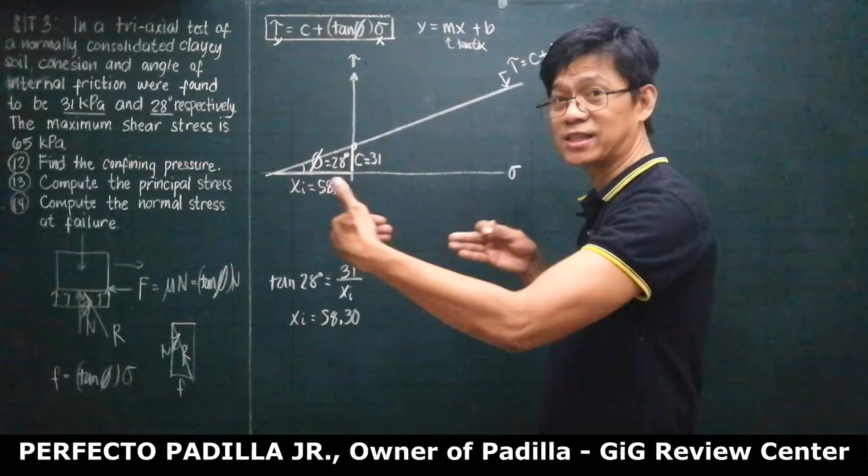Now, in the Mohr circle, for the triaxial apparatus, first we draw the stress along X. So the stress along X in the triaxial apparatus — this X point — would be only the confining pressure, sigma 3. This is what's asked in number 12, so we are looking for this value.

Now, in our Mohr circle, the delta P, or deviator pressure/stress, is the diameter. So as delta P increases, the diameter of the circle gets bigger and bigger, meaning the actual stress is increasing. We say it reaches the point of failure when the actual stress reaches the capacity. This point of tangency is the failure point F — the point of tangency. So what we remember is: the Mohr circle at the point of failure always is tangent to, or touches, or reaches the capacity line.

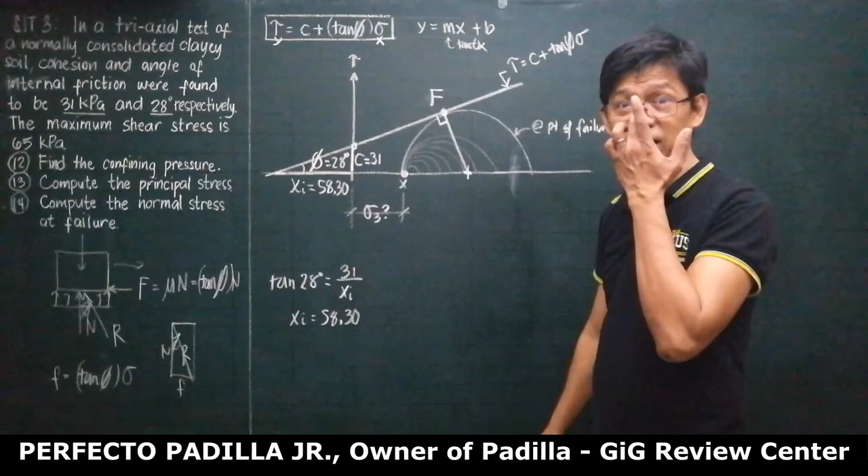So sabi natin sa geometry, di ba, when a line is tangent to a circle, the first step is to connect or draw the radius connecting the point of tangency to the center. Ito yung center natin. Meron sa ating binigay dito, ang ating tau max is 65. Maximum shearing stress, dahil shearing stress is vertical, so the maximum shearing stress is at the highest point.

Ito yung ating tau max. Okay, so obviously our tau max is simply the radius. Correct? And this, of course, is 65. So ang ibig sabihin, ito ay, this is the radius, which is 65. This is also radius, which is 65. This is radius, which is 65. This is 65, this is also 65. Tama? Okay, now ang hinahanap sa atin dito, sigma 3, paano natin isa-solve?

Ganito, ha? Okay, now di ba sabi natin sa geometry, basta merong point of tangency, sigurado gagamitin yung triangle containing this radius. So if I will take this triangle, sa triangle na to, I know one angle, I know another angle. If I need it, I can solve this angle now. So this is the complement of this dahil 90 to eh. One side, one angle, another angle, two angles one side, I can solve this side. That contains sigma 3. Dito sa side na to, ang unknown lang sigma 3 because we know this, I can solve this, right? By taking the sine of 28 degrees from this triangle, its opposite, 65, over

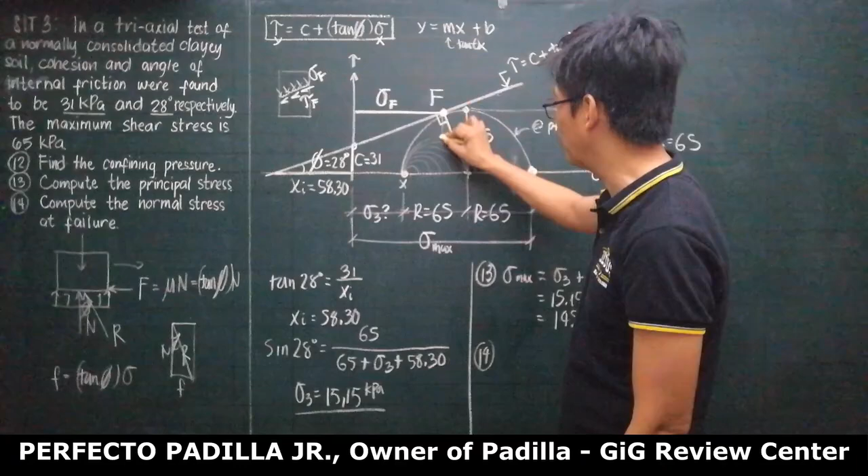Ito yung failure. Hindi naman mag-fail yan ng horizontal eh, nakatagilid. So ibig sabihin, ito yung failure plane. Ito ngayon yung normal stress at failure plane F. Tapos, yung shearing stress dyan, ito ngayon yung tau at F. Naintindihan nyo yung figure? Okay. So ito yung sigma F, ito yung tau at F. So paano natin masosolve to?

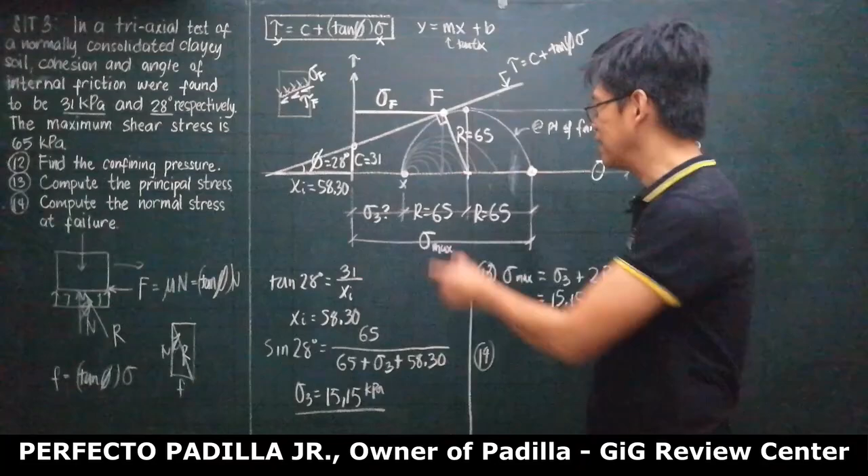Ito alam natin, sigma 3 plus 65. So para ma-solve yung sigma F, kailangan natin ito. Let me call this as Z. Okay, now look, dito sa triangle na to, from horizontal to incline is 28 degrees. So from the normal to incline, ito. To vertical, horizontal to incline is 28. From vertical to normal, this must also be phi, which is 28 degrees. Tama po? Okay.

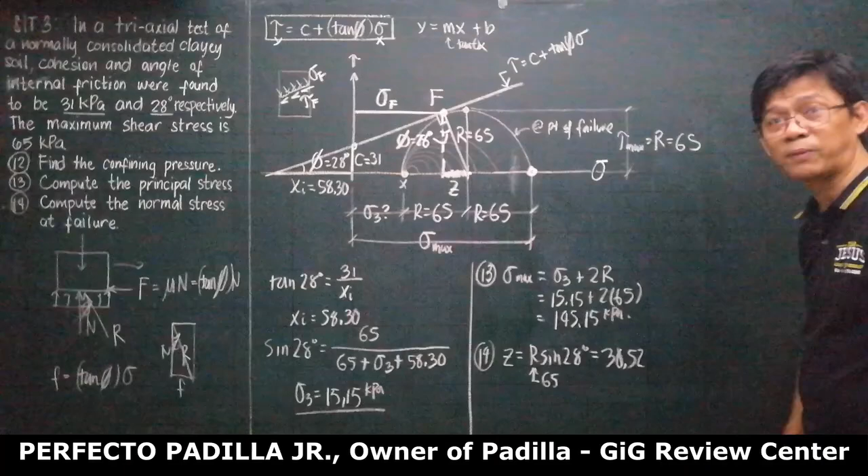Now, so therefore, in this triangle, R is the hypotenuse, Z is the opposite. So therefore, my Z is going to be R sine of 28 degrees. Yung R natin is 65. 65 sine of 28 degrees, this is going to be 30.52 kilopascal. So ito ay 30.52.

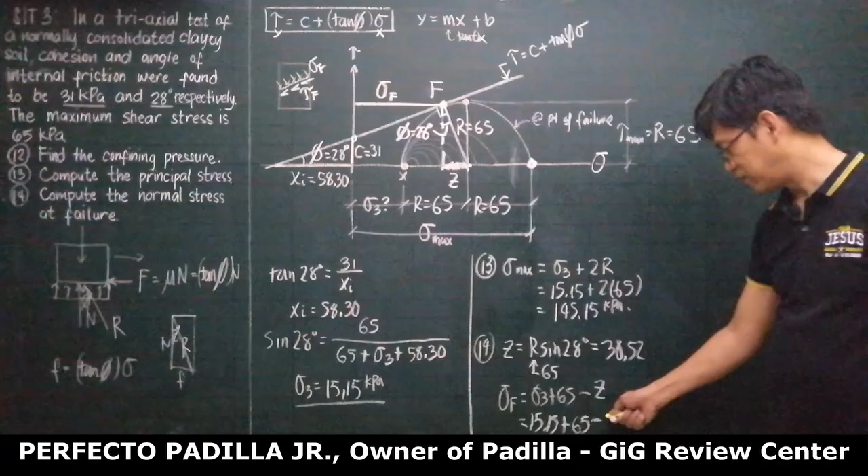So therefore I am ready to solve sigma F. My sigma F or our sigma F must be equal to sigma 3 plus 65 minus Z. Okay, so we just substitute our sigma 3 is 15.15 plus 65 minus Z, 30.52. So therefore, our sigma F is going to be equal to 15.15 plus 65 minus 30.52. This is 49.63 kilopascal.